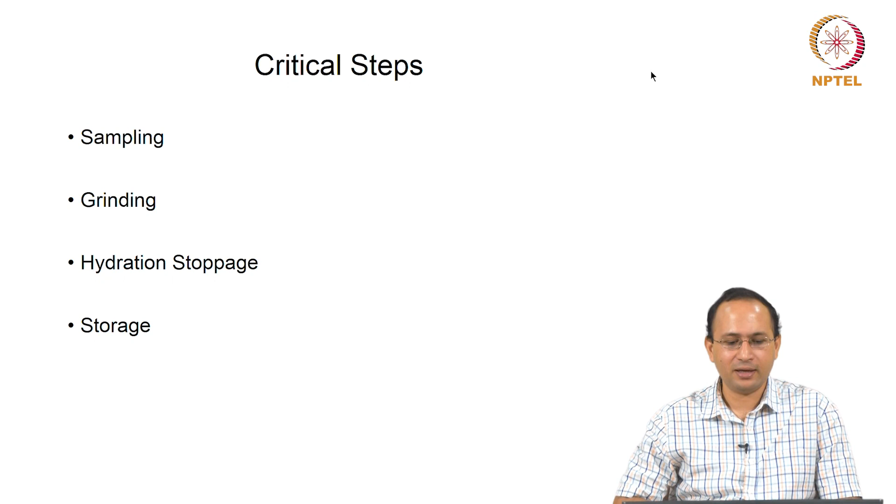Okay. So critical steps of sample preparation involve sampling, grinding, hydration stoppage and storage. We will go over these so that we know how to do it. So sampling is the most critical step, as you can guess, because it is always a challenge to get a representative sample. If you want to get an idea about the overall behavior, how to get a representative sample is very important. So for that you have to work out the purpose, what kind of techniques or what is your aim.

So for example, for XRD a few grams of sample would be required, but for strength determination a few grams will not do anything. So it depends on the goal, what you want to achieve. You also need to have a general idea about the internal structure. So for a sample from the interior, for example, if you are doing a compression test, after the compression test you may have induced micro cracking in a lot of samples. So you have to be aware of that, and make sure that the sample you are taking is free of that.

So if you are looking at microstructure, for example, the internal cracking will affect it; you will not be able to determine a lot of characteristics. So these are the things you have to keep in mind, and if you are looking at externally induced deterioration, it could be any type of attack like salt attack or sulfate attack.

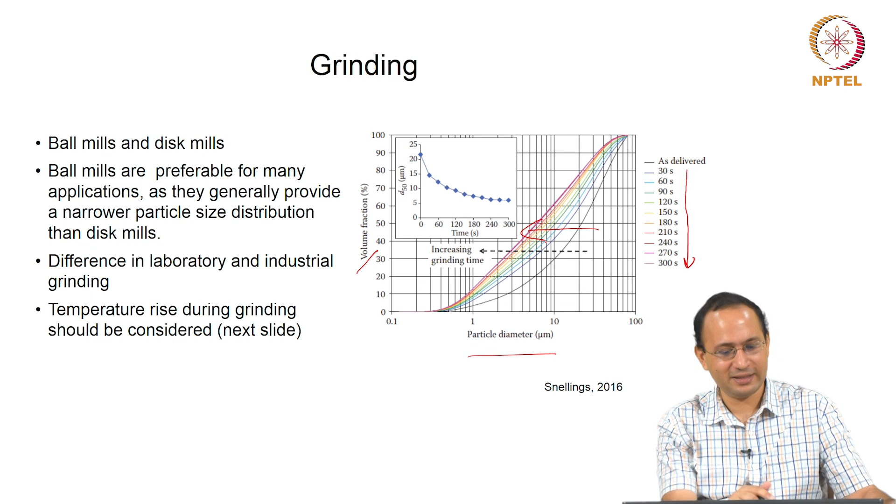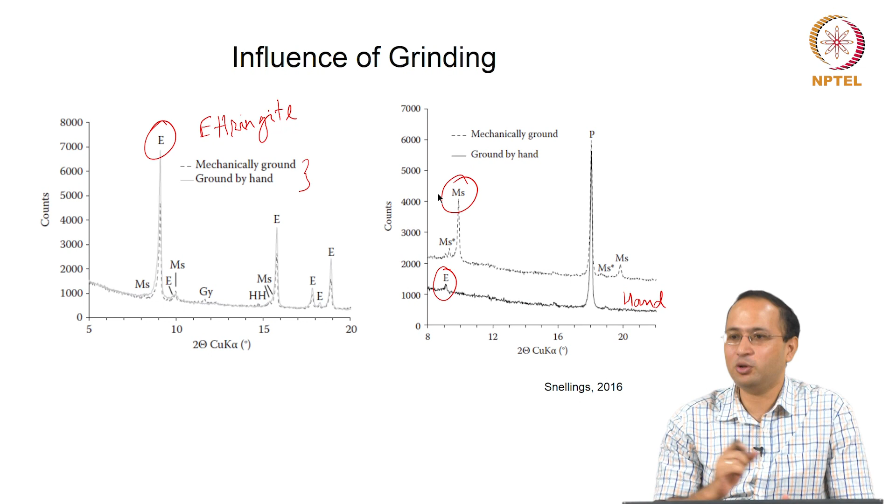Okay. One of the most critical steps is hydration stoppage. So why do we have to stop hydration? We are talking about cementitious materials. Basically we mix cement and water and let it hydrate, and during the hydration you have formation of calcium silicate hydrate; cement hydrates continuously and gains strength.

So why is it critical? It is critical for establishing the correct age. If you want to understand the effect of degree of hydration, if you want to compare different samples, you are talking about 1 day old sample, 7 day old sample, 28 day old sample. So you have to make sure that you collect the sample and stop the hydration so that no further hydration takes place.

It is also particularly important for techniques that employ vacuum, so you have to make sure that your sample does not have moisture. So in general, better to remove water before long term specimen storage. What we usually do: we collect the sample, we grind it, we stop the hydration and then store it for some time. Then we can do analysis depending on availability of instrument. That is the usual way.

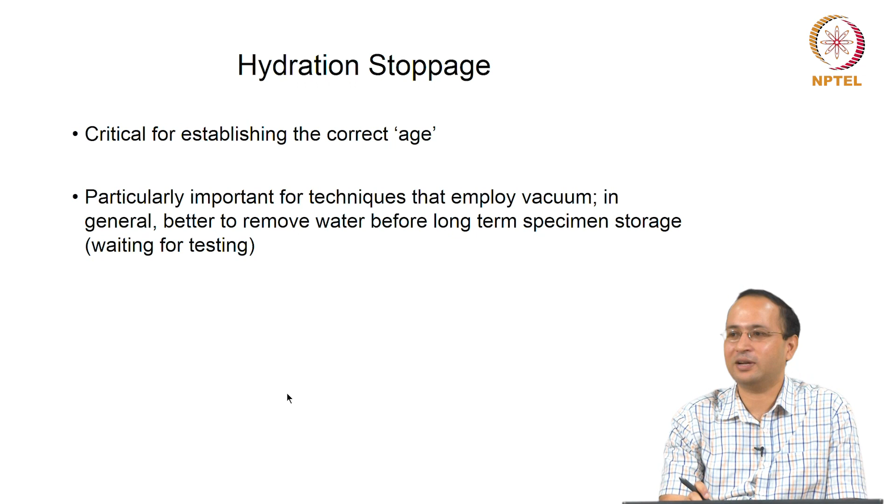So there are different techniques for hydration stoppage people have used, but there are always some advantages and disadvantages. You see oven drying, vacuum drying, freeze drying, solvent exchange. What do you mean by oven drying? You are putting your sample at some high temperature to remove the water. The idea is to remove the capillary water.

How do you stop hydration? You mix cement and water, you have formation of hydration products like calcium hydroxide, calcium silicate hydrate, Ettringite. Also you have some capillary water left. So you have to remove the capillary water. How do you remove it? One simple thing that comes to mind is, why don't you heat it up?

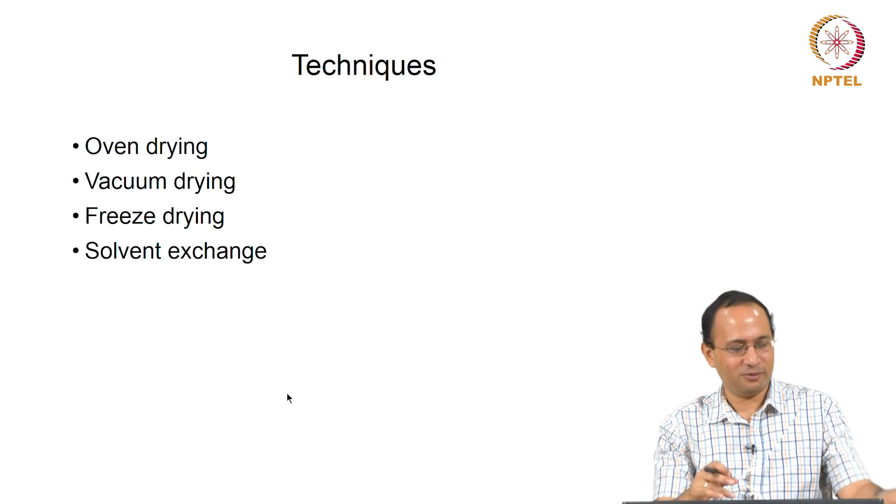So oven dry. Vacuum dry is you put it in some vacuum. Freeze dry, you freeze the water, then let it sublimate. Solvent exchange is you are using some solvents which are miscible with water and then let it evaporate. We will go over it. So oven drying is complete removal of free water at 105 degrees Celsius. If you treat your samples, cement paste, concrete at 105 degrees Celsius, you will remove the capillary water.

But the issue is it is very harsh heating. Such heating can alter the microstructure because you are letting your sample undergo 100 plus degrees Celsius. Sometimes it can even destroy phases; for example, Ettringite gets affected if you go above 60-70 degrees, you will start seeing the effect. Even on CSH you will see some effect. So at 105 degrees Celsius, although you are removing water, you are affecting other phases also. So see the issue.

Lower temperature heating can be adopted, but then you are not sure whether you will remove the complete free water or not; that is the challenge. You can use 50 degrees C, 40 degrees C, but then it will take forever and you are not sure when you are going to remove it completely. Usually it is combined with vacuum drying. Make sure that your sample is in vacuum. Okay.

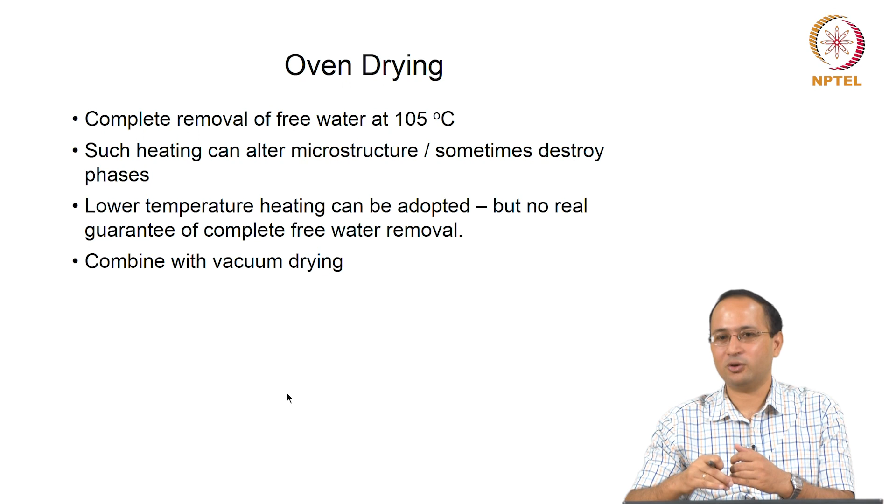Freeze drying is: you first lower the temperature immediately. So, you freeze the water, right. Now, water is frozen and now lower pressures can be used to let the frozen water directly sublimate to the gas phase. So, we allow sublimation. So, it will directly convert to gas phase, right. That is how we are removing the water.

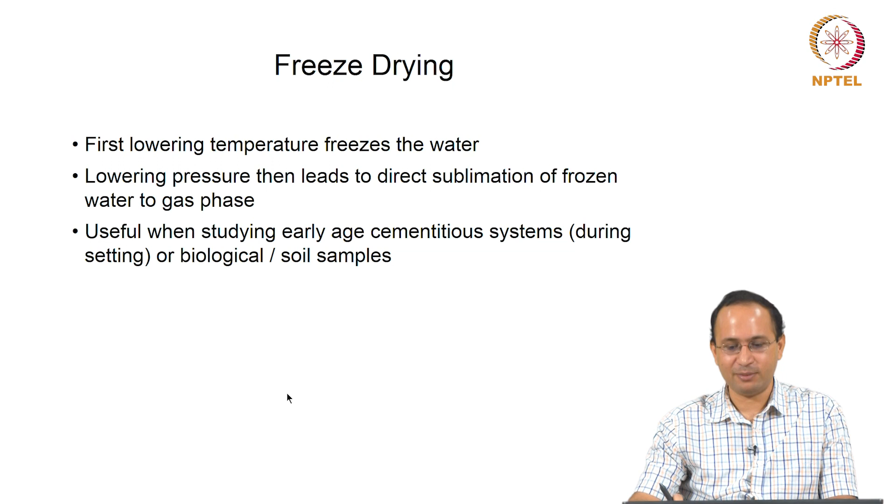So, it is useful for studying early age cementitious systems during setting. Suppose you are interested in cement in a few hours, like which are 2-3 hours old, or very early age cementitious systems, or biological and soil systems, that is where it is used.

Most commonly used technique is solvent exchange, right. So, the idea is we immerse samples in acetone or isopropanol for a few days. Alcohol will mix with water, these are miscible liquids, and then we use removal followed by vacuum drying to remove the solvent. Then we want to remove the solvent, right. So, let it evaporate. So, that way we remove the water also, but it may tend to alter some phases.

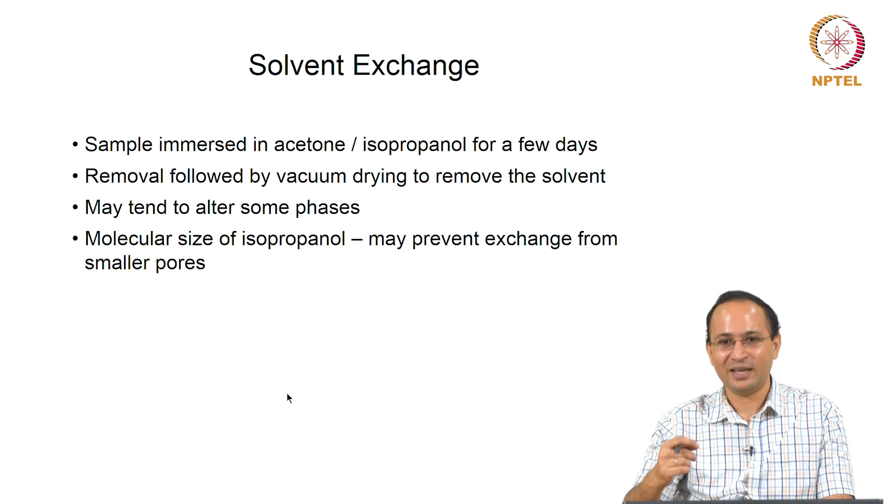There are some challenges. Molecular size of isopropanol may prevent exchange from smaller pores, right. Although you are using it, are you sure that you are able to remove the water from the smaller pores? So, here again are advantages and disadvantages, you can go over the list, but let us see solvent exchange. It is easy to perform, you just have to submerge your sample in isopropanol or acetone. These days most commonly you use isopropanol, acetone is harsher.

It usually preserves your chemically bound water, preserves microstructure, and removes soluble ions from pore solution. Direct drying is also easy to perform, right, but in terms of disadvantage, it will affect your chemically bound water. Microstructure generally may also get altered because you are using high temperature, right. So, you can go over this list, it will give you some idea about the advantages and disadvantages of these techniques.

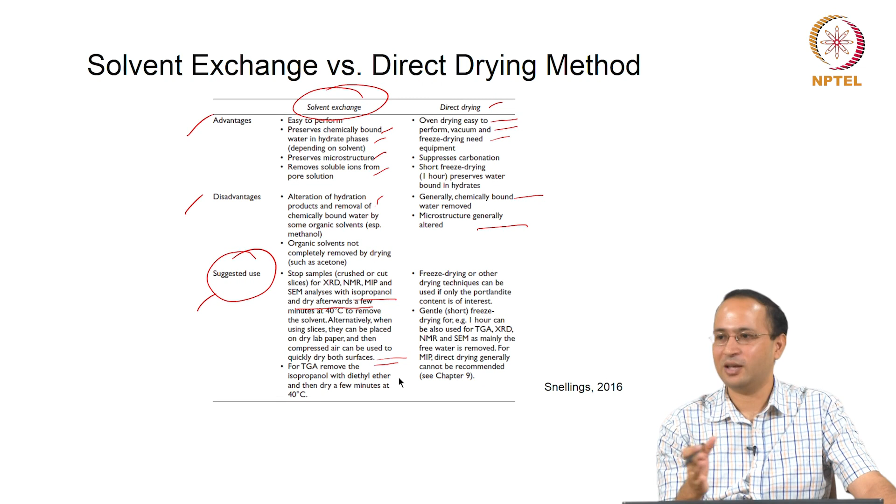You can also see the suggested use. So, stop samples for XRD, NMR, MIP, SEM analysis with isopropanol and dry afterwards for a few minutes at 40 degrees C to remove the solvent. Alternatively, when using slices, they can be placed on dry lab paper and then compressed air can be used to quickly dry both surfaces. These are some of the processes you can adopt when characterizing your samples. But you have to make sure you are following the same process, because a slight difference will also cause a difference in your properties, very important.

Finally comes sample storage. You want to store your sample so that nothing is altered, right. So, obviously you want to make sure it is free from moisture absorption. If there is moisture, since we are talking about cementitious material, cement will react and hydration will take place, which you do not want. Carbonation is a realistic possibility. You have calcium hydroxide in the system, calcium hydroxide tends to carbonate and form calcium carbonate. Also you have instances of carbonation of calcium silicate hydrate.

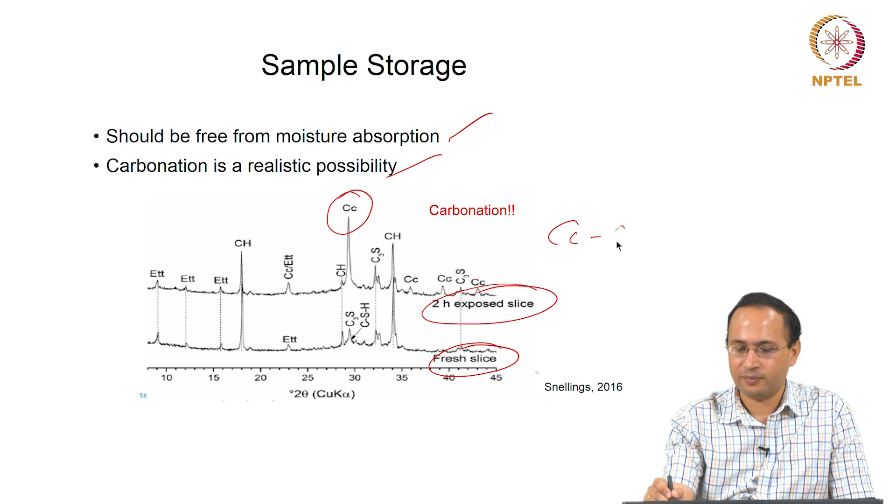In this case you see this is a fresh slice, and this is a 2-hour exposed slice. What do you see? The occurrence of this Cc, Cc is calcium carbonate. So, when you are exposing it to atmosphere, you are seeing the formation of calcium carbonate. You do not want that, because that is altering your phase assemblage. So, these are the things you have to keep in mind. Usually, after solvent exchange, you dry, remove the solvent and store it in low vacuum continuously.

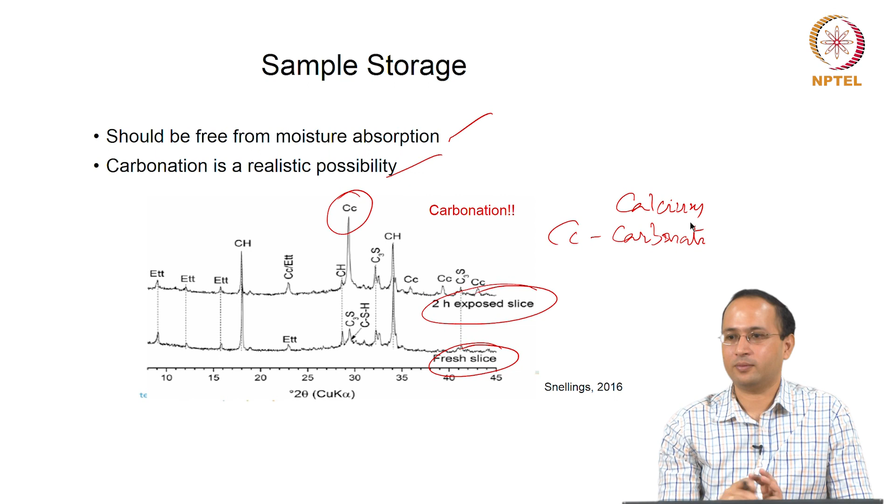Okay, now we will come to sample preparation for XRD. So, you got some general idea, right? How do we stop the hydration, and what other things like grinding can affect your properties. Appropriate sample preparation is critical for X-ray powder diffraction analysis. Intensity and peak position should be unbiased by sample preparation. You do not want to adopt a sample preparation which will affect your sample. So, it should be unbiased by sample preparation and sample inherent problems.

So, basically you have to take care of two things: one is particle statistics and one is preferred orientation. For particle statistics, you want to make sure you have enough crystallites which diffract at a certain angle, basically an infinite or very large number of them.

So, you will deal with the particle statistics. Also you want to make sure the crystallites are randomly oriented, because you have a lot of plate-like structures, a lot of needle-like structures in your cement paste. So, you want to take care of preferred orientation. So, these are the two things you have to take care of. Ideally, powder should be ground to particle sizes of less than 5 micrometers.

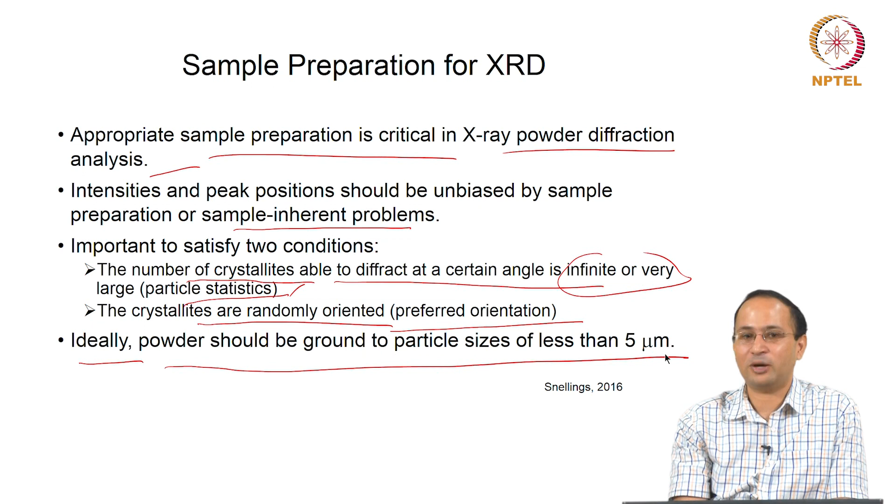As we saw in the last lecture, there are a lot of issues we can resolve when you use fine powder. Insufficient fineness is one of the most common sources of error in quantitative phase analysis of Portland cement. If you have insufficient fineness, that will cause a problem. Microabsorption and extinction effects can be best mitigated by reducing particle size of the powder. So, that is the key, you have to make sure you are using fine powder.

So, grinding should occur without sample fractionation, phase transformation, decomposition, amorphization. You have to make sure of that. You have a sample, you grind, and if you analyze your sample before and after grinding, you should not see phase transformation, because otherwise that means you have changed the sample. Grinding should not lead to decomposition of a phase. We saw when you grind too much or adopt mechanical grinding, depending on the temperature rise, you may affect the phases, and that will change your phase assemblage. Amorphization as well.

So, over-grinding issues can be avoided by using a liquid medium. How do you resolve it? You can use a liquid medium while grinding. That will dissipate the heat, but we can't use water, because water will react with the cement. So, we can use isopropanol, acetone, ethanol; these are commonly used for Portland clinkers and cements. So you are making sure there is no further hydration, and at the same time that heat is dissipated, so the phases are unaffected.

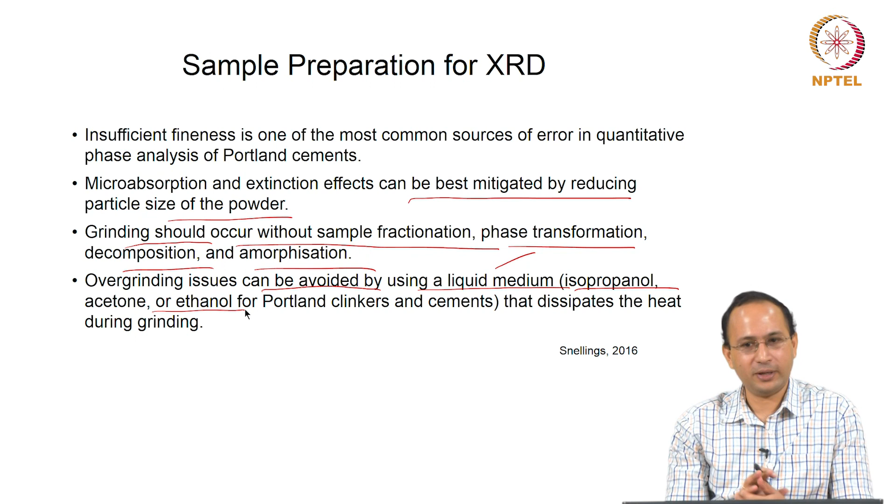So, now you have a sample, how do you mount it for X-ray diffraction? Sample surface area should be large enough to avoid beam overflow and sample transparency aberrations. You want to make sure you have enough thickness of the sample. It is easy to visualize. At lower angles of theta, your beam will spread like this. Your sample should not be so small that there is a beam overflow. Think of the X-ray diffractometer: you are moving along the circle, theta from smaller angles to large angles. So, these are the issues.

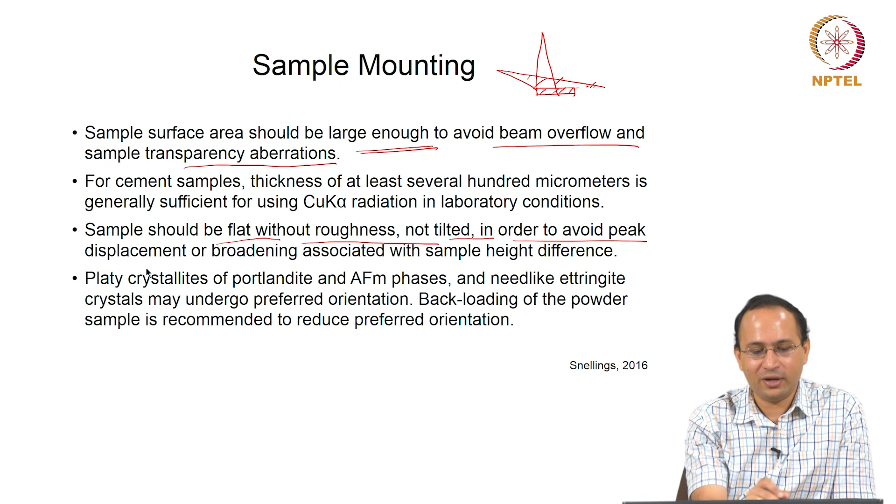So, you have to make sure you have enough surface area to avoid beam overflow, and for sample transparency, it should have some thickness; several hundred micrometers of sample thickness is good enough for X-ray diffraction of cements. Sample should be flat, without roughness, not tilted, in order to avoid peak displacement. We talked about it: if it is not in focus, you will see peak displacement, and you may also have broadening associated with the sample height difference.

Again re-emphasizing, very important: platy crystallites like Portlandite and AFm phases are commonly present in cement paste, and they have plate-like structures. Platy and needle-like structures, like needle-like ettringite crystals, may undergo preferred orientation. They will tend to orient in a preferred direction just because of the nature of their shape. So, backloading of the powder sample is recommended to reduce preferred orientation.

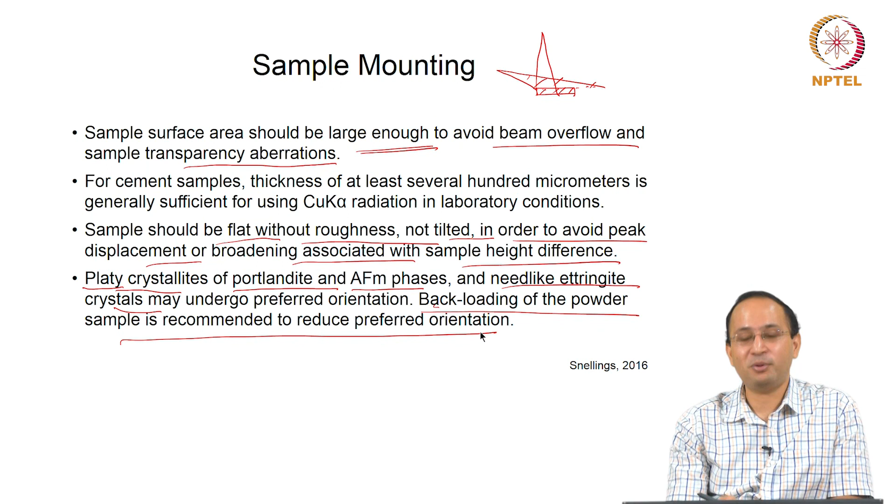Backloading means: when you do powder diffraction, you have a sample holder, you put your powder, you press it. When you are pressing your sample from the top, you may cause preferred orientation. So, backloading means you flip your sample and analyze that part. That can help with preferred orientation if you see it in your sample.